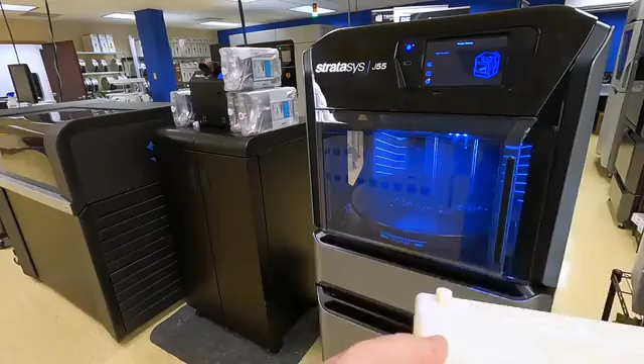Let's print the bottom housing in ABS on our F370, and how about for the anti-vibration feet, let's print that on our Stratasys J55 printer in an elastomeric material, which will do a good job of simulating the end silicone material that I'm planning on this part being made in.

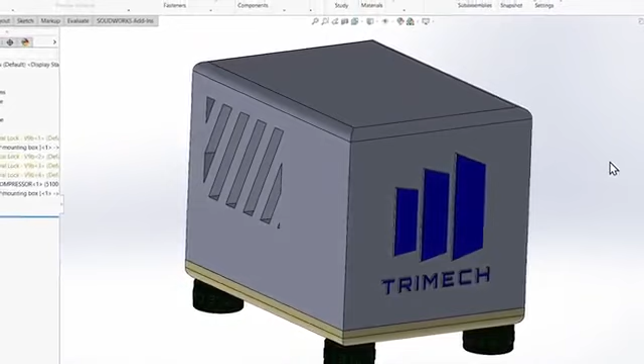The components that I want to prototype here go to this noise dampening box for an air compressor motor. If I go ahead and hide the box itself, you can see the actual air compressor motor. And really all I want to see is how the base of the assembly mates up with my anti-vibration feet.

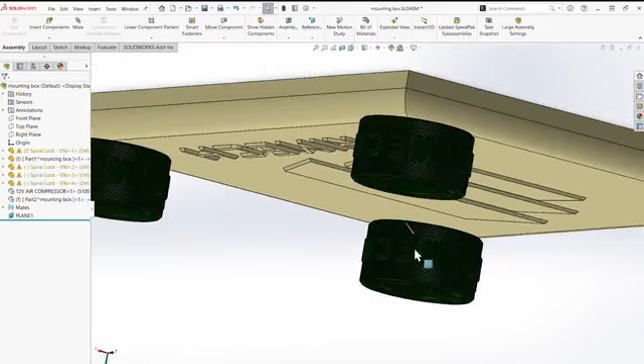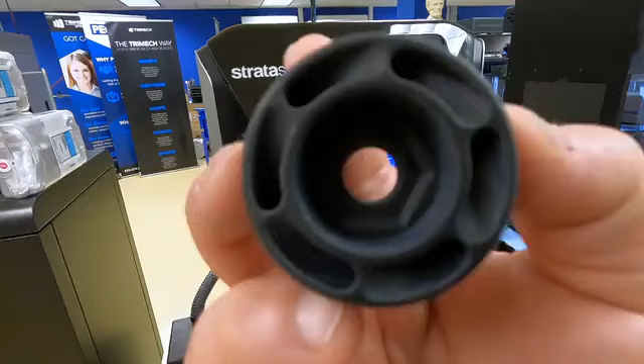And you can see actually if I hide one of these, that I have my threads on the base of this part. And actually if I hide that, you can see that my actual noise dampening parts do have threads that match them as well. So I just want to make sure that they fit together, and I want to see how that acts with compression of a rubber-like material, since these feet are going to be made out of a silicone.

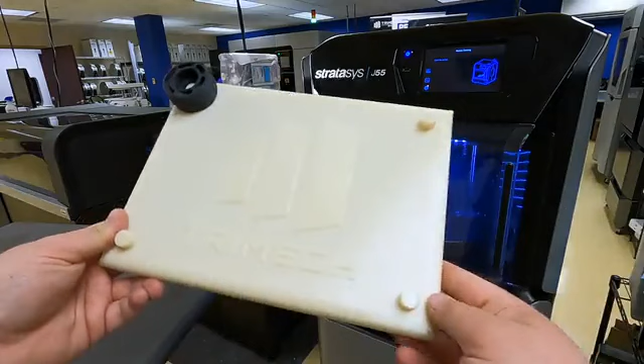So the J55 is going to do a great job using the elastico material to simulate that rubber-like material, and using ABS for the bottom of the assembly itself will give me a really nice, solid, rigid base to test on. Wow, these parts on the J55 look incredible. Now I just need to get them over to the water jet to clean them off.

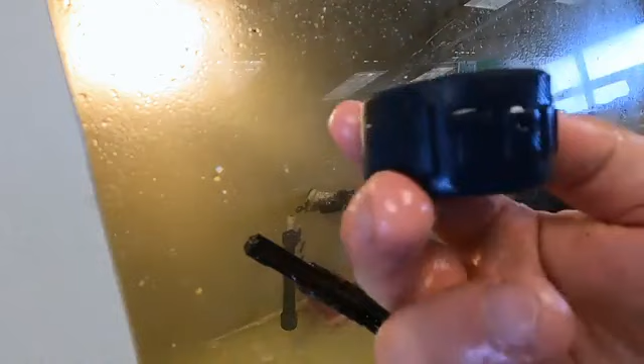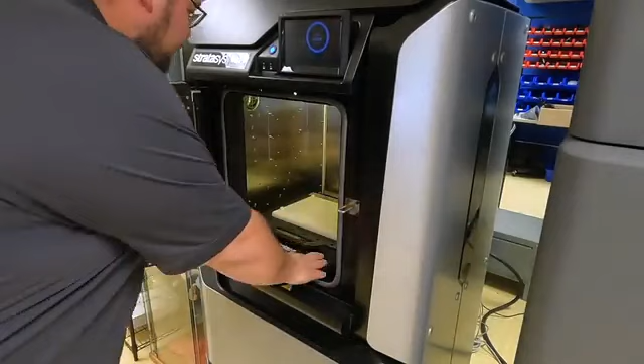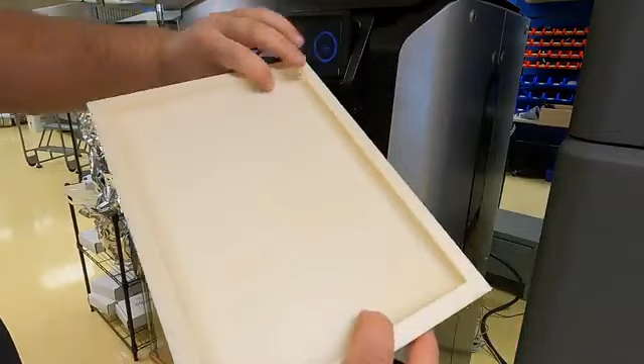Now, the F370, where our ABS part is printed. Wow, this looks incredible. Our Trimech logo looks awesome. We have our inner fillet. We're gonna have the part that mates to it on top, the cover itself. The motor goes right here.

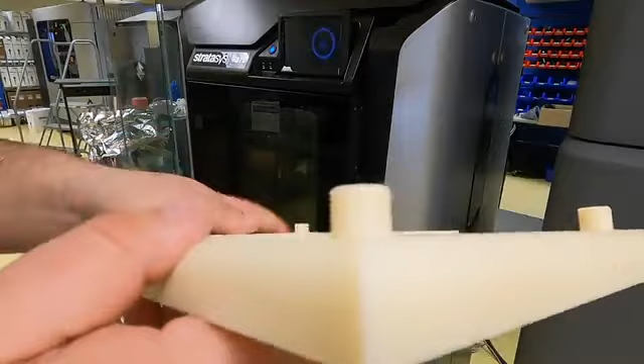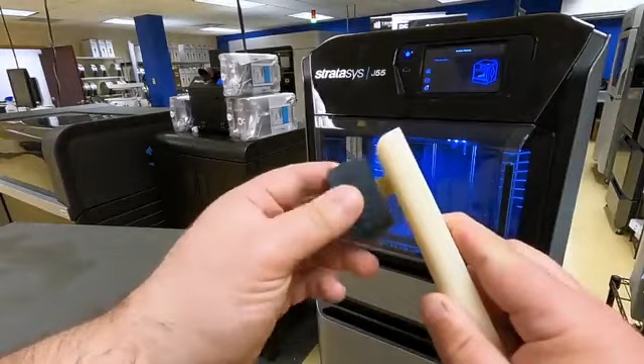And our threading to mate up with those anti-vibration feet looks incredible with no support used at all. This is an awesome looking part. The moment of truth. Let's see how they fit together and work. Wow, they fit together perfectly, just as I drew it up.

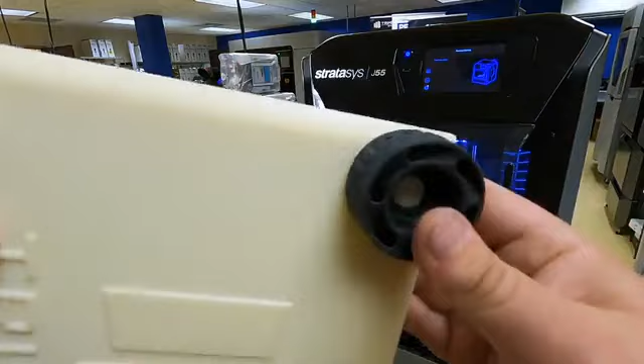We have the lower portion of our housing. We have the compressive anti-vibration pad foot. And now all I need to do is go make and clean off 3 more to finish this design off. Wow, the F370 and the J55 really did a fantastic job.